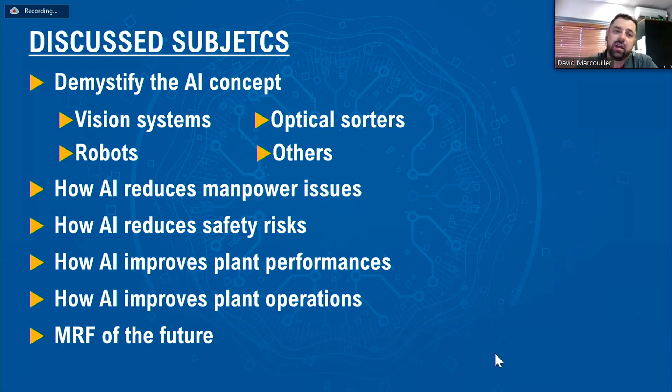So first, just to bring everybody on the same page here, I'm sure a lot of you speaking with me this morning already know this. Artificial intelligence identifies what it sees through a camera, which is the eye, pretty much the same way a human eye does. So it sees color, it sees shape, it sees characteristics, and it can learn from it.

It can recognize dirty material, commingled through forever changing situations, just like the sorter would do. It continually improves from operating experience to get better detection and identification of the products. It can get the data all together and compare it to generate the signals that it needs to generate.

It can identify stream composition as well, based on the volumetric surface area. Pretty much, when we do AI in our robots and in optics, it's the same way. We also always go by order of priority for tasks, and it's most likely always based on price. When we do sorting, when we do quality control, it's based on surface area to get what's heavy and large out of the stream when we want to QC a stream. But that predetermined order is something that we can play with based on the need.

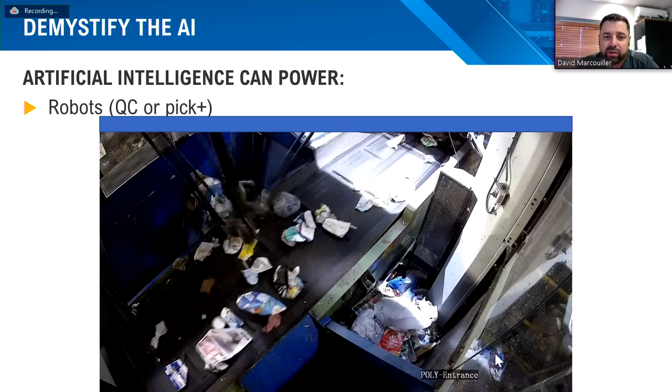And I've got a second video where it QCs a poly line. Same thing. You can see some of the products also disappearing right when the robot tries to grab it. It's because the conduit that creates the suction on our robot is over 2-inch diameter, and some of the material can get sucked up straight to a cyclone, a discharge cyclone on the side, to prevent jamming in the nozzle. But that's a little bit of what they do. You can see how fast they're moving and the kind of tasks they can achieve.

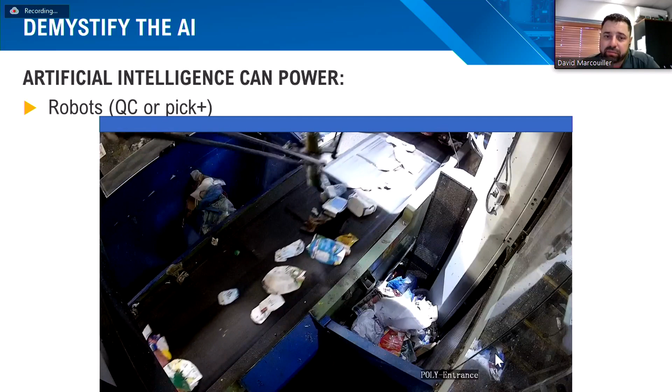So they're powered by AI. AI can also be utilized in optical sorters, combined with the hyperspectral. They can power the air jets, get the optics to do a better signal because they're combined with what even a human eye cannot see.

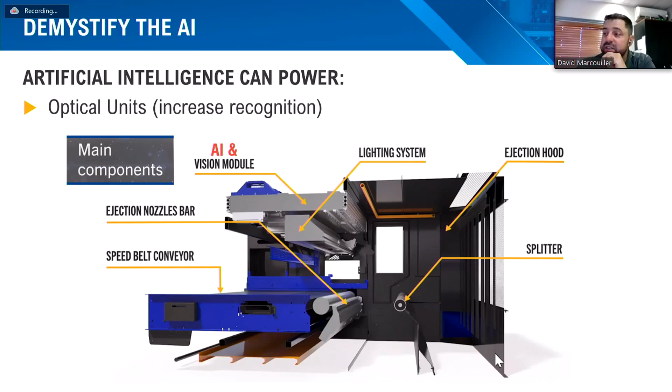So I'm getting to the manpower part of my presentation now. It's just presenting all of that to show what it does and where it pretty much substitutes or helps complement the manual sorting position, so the AI combined with the hyperspectral in this case will get better signals and a better decision-making process for the material and what it needs to do with it.

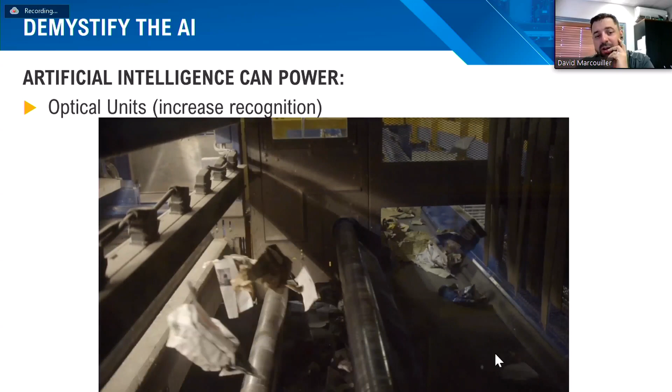That was an example where those signals combined are firing on brown material. So we combine the vision system with the visible material with the hyperspectral in one optic. So we're ejecting down all of the plastics and up everything that's brown here.

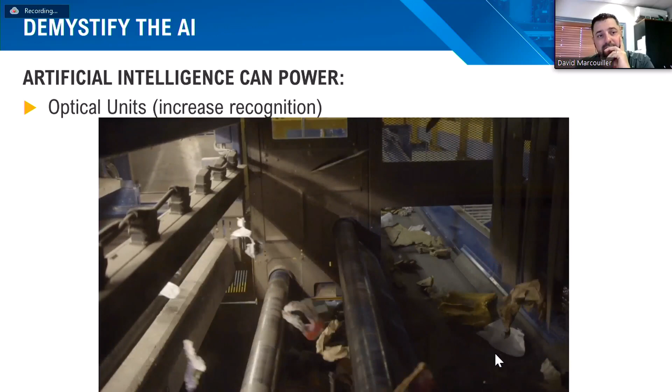So how AI reduces manpower, that's the big point here. The vision system, AI applied in a vision system, can reduce the required manual audits. Those vision systems are being installed on end product lines or on the line that's usually going to the landfill, to the rejects, so we can see how the system is efficient. We can see if we're missing a lot of material, and we can see if something's wrong with our optical system or other sorting equipment in the facility.

So they basically reduce the need for manual audits because you can definitely see a trend. They can report a real-time tendency of the MRF. You can go with that.

They just don't do it all day, and they're not necessarily constant. And when they don't show up the next day, that's affecting the MRF and the whole recovery system. The robot shows up every day. There's no break. It doesn't go on pause, and it doesn't shift its focus to something else or somebody else talking to it. It just sorts all the time.

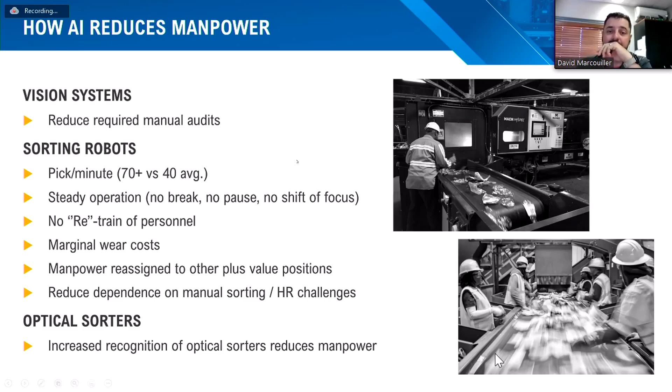The AI and robots are protecting workers from high-risk handling situations, needles, and safety problems that can happen. We've all seen a plant shut down because of needles coming in and being broken all over the place. This is something the robots don't suffer from, obviously.

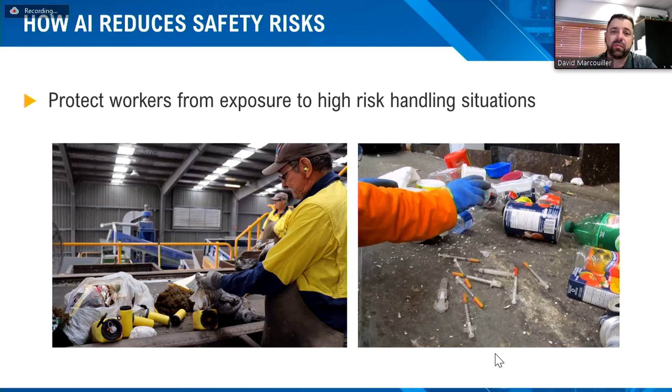And with the AI and continuous learning, evolution, and optimization, the vision system and plant interconnectivity basically give you, the operator, a better vision of everything that's happening in the system, combined with the SCADA system.

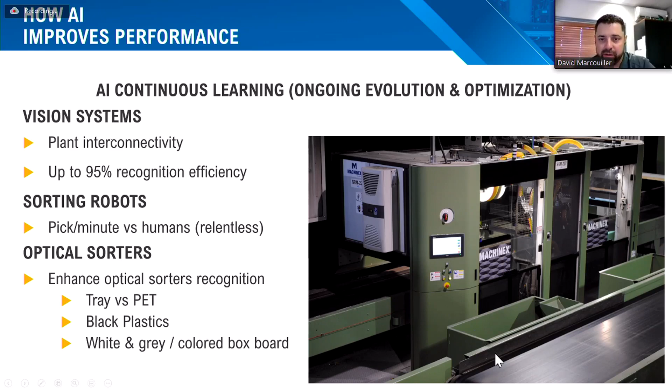The sorting robots' picks per minute versus the human, we just saw that increase significantly. And the optical sorter has enhanced optical sorting recognition - tray versus PET, black plastic, white, gray, colored, and box board. So all of the better identification through this whole process.

The challenge is the variation of the inbound material and government regulation. We see a lot of EPR being installed here in Canada, bottle bills, all of that. The AI can adapt and you can improve your sortability around it.

The artificial intelligence benefit gets all of your equipment that's equipped with AI connected together in a MRF to give you real-time information as well, which sorters wouldn't be able to do. They all do their job, but in the end, they don't necessarily report what's happening and how the material is changing, and whether the system should be adapted down or up because material's not showing up on the belt or something like that.

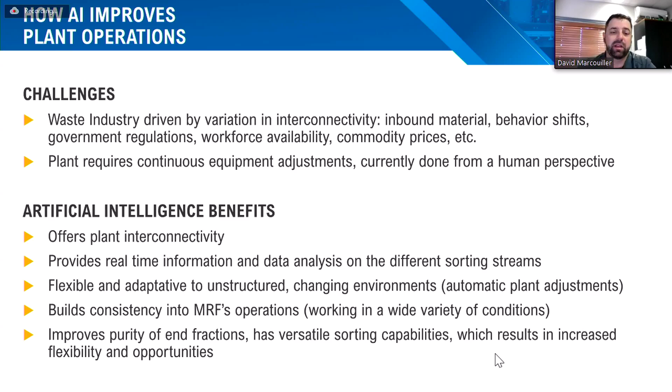So all of those together are bringing you to pretty much a plant of the future, where all of that interconnectivity of all the AI technology gets combined together for a successful plant operation - predictive maintenance, cleaning, failure, or something we didn't talk about necessarily yet.

It's all of the information you can gather from the MRF. AI is not just necessarily visible recognition - it can also learn from the breaks, learn from all aspects of maintenance in the system. It can be integrated into failures and maintenance recommendations for the whole facility.

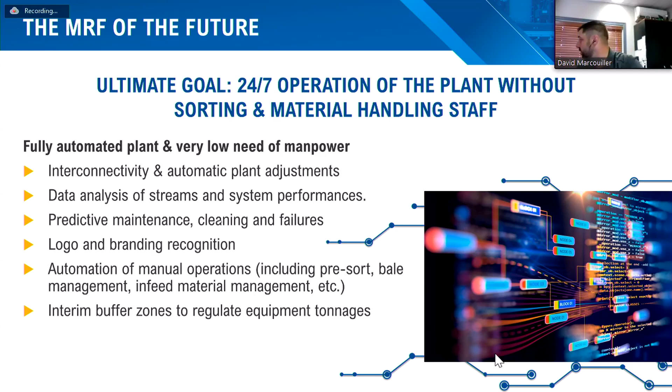And that completes it. I don't know if I took more time than I have or everything, but...

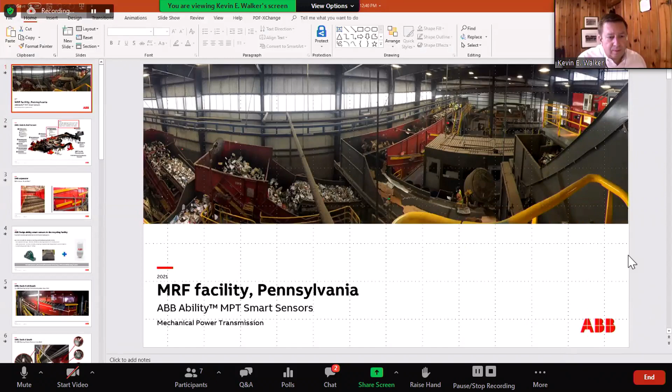And we'll go to the PowerPoint. There, very good. You should be seeing a panoramic shot with a cell phone of a recycling facility, somewhere in eastern Pennsylvania. The customer here has actually given me permission to use these pictures and their name if we want to talk about that, but this is sort of a generic presentation. This is a case study - we're going to talk about one application we see here and what the ABB and Dodge business has done at this facility. I appreciate your attention, and I hope you'll find this helpful and interesting.

I kind of skipped the introduction, so let me talk a little bit about myself briefly. ABB is a huge company, we make robots similar to the ones you just saw - I was very impressed with David's presentation, we make robots that probably do similar things. We have four separate divisions within ABB, one of those is called the motion division, that's motors and mechanical power transmission, and that's the division in which I work. Within that division, the US-based mechanical power transmission brand is Dodge, the old Dodge brand of power transmission equipment. So that's bearings, bushings, belts, connections, all that kind of thing.

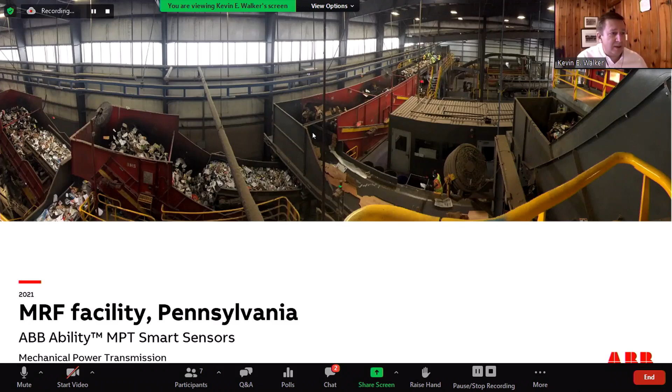and remove those out of the application very early in the stream here. Just keep in the back of our mind what happens if this machine is down for any period of time, and what that does for the rest of the production cycle.

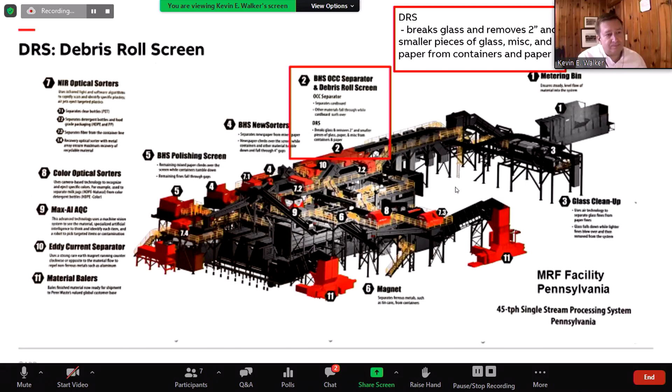The inside of that machine, if you buy a brand new one, will look something like this. They're not all exactly the same, but this particular model where our technology is being used has a bank of 15 shafts, and each shaft has a triangular shaped disc on it that is constantly turning against each other, designed to break that glass in that application.

As time goes, that glass is very abrasive. It wears down those triangular discs that are on that shaft. It's a very aggressive, dirty application, and this is a wearable part within this machine.

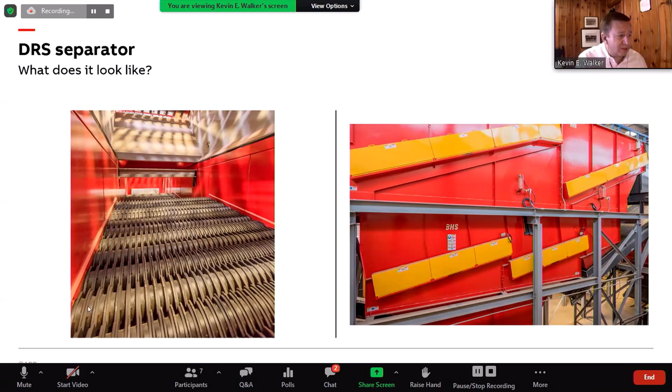On the outside of the machine, again, you see these doors or guards. These are safety guards, bright yellow. Behind that, you would see the bearings that are outside this machine on which these shafts turn.

So what is going on at this process, and why are we talking about Dodge bearings in mechanical power transmission in a robotics presentation? Their current maintenance program at this facility is every 2 years, because these shafts have worn down so much they have to buy and replace 30 shafts in that machine, 2 banks of 15. That's 60 bearings that they also replace at the same time.

Not only does the shaft wear out, but the inner and outer ring develop a looseness over time because of the bearing being worn out. Their general maintenance practice every 2 years is to take these shafts out, take the bearings out, and replace everything, basically starting with a new machine. That was done 2 replacement cycles ago, in the summer of 2017.

In January 2019, we launched a product called the Smart Sensor for mounted bearings. That's what you see on the right-hand side of your picture. And I've got a bearing I'd like to show you here on the camera. If you'll just hold on a second, I'll get that out.

What we started doing in 2018, in preparation for this launch, is machining our roller bearings to include, besides the grease fitting where you would re-grease the bearing, a smart sensor tag opposite the grease fitting, creating kind of an isosceles triangle shape. That extra tag allows the sensor to be very easily inserted into the bearing.

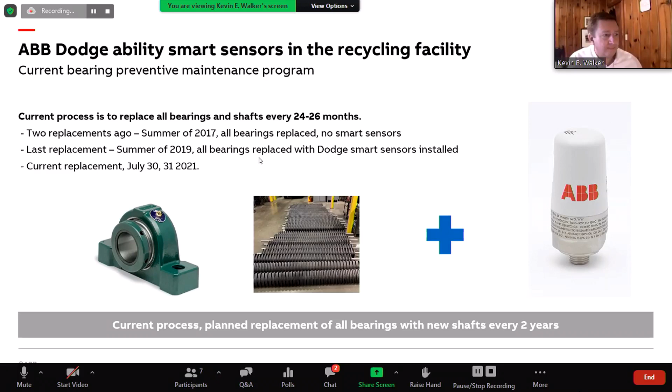I was at the customer site for the initial installation 2 summers ago, and this is what it looked like. These are the south A and B decks on the side. There's a catwalk, so it's very easy to access these bearings. Obviously the guard has been removed here, and you can see the bearings with the sensors installed.

This is a motorized gearbox that is turning all of this business here. The same application here, you see our smart sensors installed on these 30 bearings. But that's basically the process.

Commission the sensor, label it, get it attached within the ABB Ability Cloud. And ours, just like David mentioned for his process, is a cloud-based, data-driven system that allows the customer to know within an hour what his equipment is doing. So every hour our sensor takes a reading, throws it up to the cloud, and he has all of his data available to him.

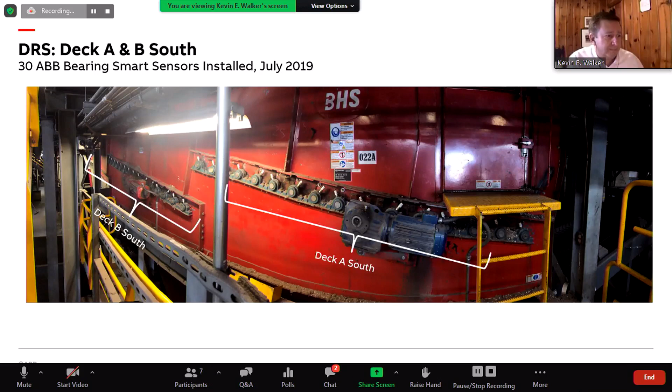We use a gateway to collect all of this data. This is a control box that is near these two banks of sensors, about 21 feet away. We've gotten data from over 600 feet in an outdoor application with this type of router, so we have very good connectivity here.

We're constantly reading the data from these sensors. They operate with Bluetooth Low Energy, and they communicate back up to the cloud through this gateway that is hardwired into their local area network here.

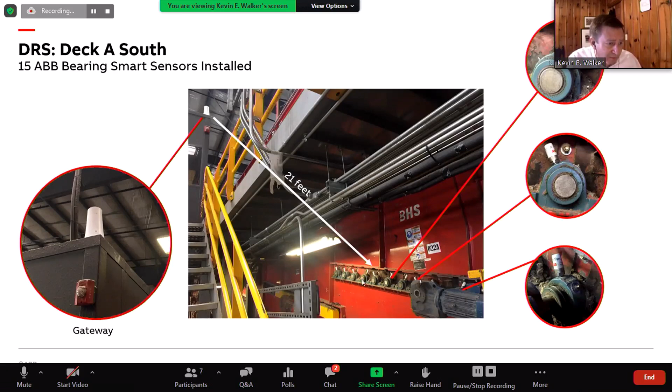This is, of course, the south side again, where that catwalk is, and you see all of our sensors and bearings. We've got the guard put back on here and our gateway installed here.

Another picture of that, we just wanted to show you how they look when they're all labeled. You see a little bit of a difference here in these two. When the customer bought the new bearings in 2019, they had some old stock shipped to them that did not yet have the drilled and tapped hole.

Here you've got the sensor offset from the grease fitting. In this case, there was no drilled and tapped hole. It's a brand new bearing they bought, but it was just old stock that was still washing through our distribution channel. So we sent them some of these adapters that we carry in stock that allow the customer to still re-grease the bearing and install it and gain the benefit of the smart sensor. That's the little adapter you see there on S12 as opposed to S15.

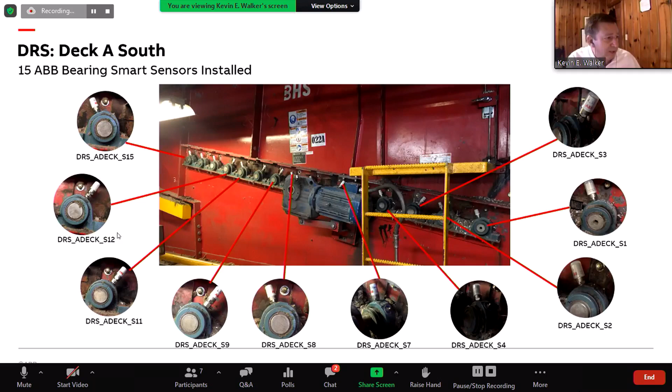This is the north side. You have to have a man lift to access it. That's what you see in the bottom half of this picture on the right, the top guard on that man lift. And then these yellow guards come off and you have access to the bearing behind a chain sprocket.

It's very challenging to clean in that area, and challenging to replace that bearing. It's a lot of downtime if a bearing goes out during the middle of a production cycle. So again, you see the smart sensor here, and in this particular side, because it is accessed by a man lift, they have an automatic greasing apparatus here and lube lines running to the different sets of bearings.

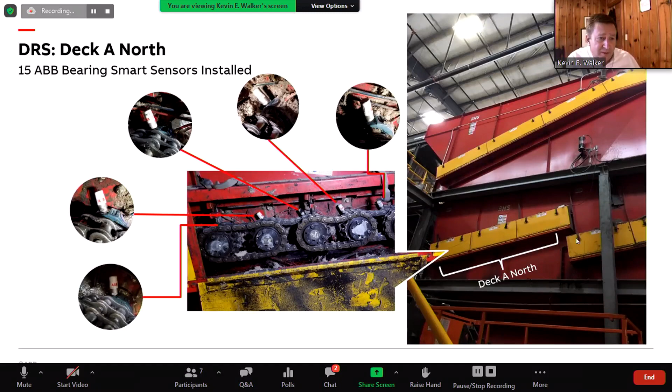Another picture of that same application, you see the automatic lubrication system here, and then you've got lube lines running to the bearings here with sprockets. That's what you see on the right, the north A and north B decks of bearings.

So that's basically the installation. We've talked a little bit about their maintenance process, and about the installation of smart sensors in this facility. What does it all mean? What does that actually mean for the customer? And what has that meant for our business as well in helping them understand what's going on with their equipment?

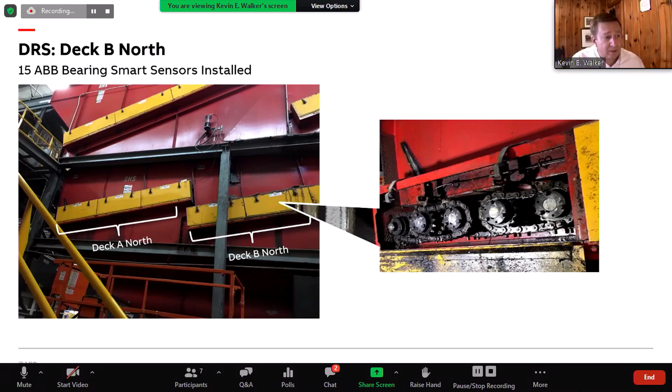Here's the final picture of this installation. You see we put another gateway. That is a temporary location, mounted on this bracket here in a more permanent mounting, but we're using this conduit to run our wire. That again is through their local area network, a second gateway. It's a redundant system. You only need one gateway in this particular application because of the closeness of the sensors to where the gateways are located. But we have two of them in case they have a power failure. One of them might still keep, if it's on a different power line, might still be collecting data.

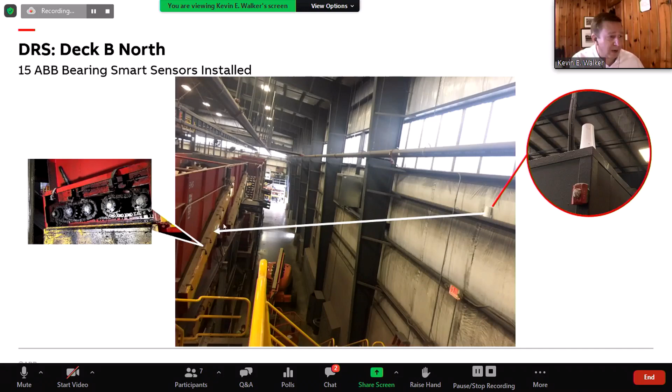So what is the problem in this application? And, you know, I'm of a certain age where my kids are nearly grown. I've got two still in college, but they're out of the house. But my first child was born in 1996.

And in 2001, if you wanted to watch Bolt or The Incredibles or Over the Hedge, or for my daughter, any of the princess movies, Cinderella from Disney, you had to go to this little store called Blockbuster and rent a plastic video cassette. Now, for those of you under the age of 40, you don't know what that is. It's a plastic box about this big, with two plastic wheels that turn in it. Wrapped around those wheels is magnetic tape, designed with a very high tensile strength. You can cut it, you can tear it sideways a little bit this way, but it's very hard to break just by pulling on it.

These plastic cases come apart and similar devices like this, and that tape comes out of those spools. If they make it this far into the application, they start to wrap around those triangular disc shafts on the inside of the machine. When they wrap around that shaft, they create a binding in the bearing. What they will do is crawl down the shaft until they're cutting into the backside seal of the bearing. Once that's happened, that shaft may turn a few more cycles, but that bearing is gone.

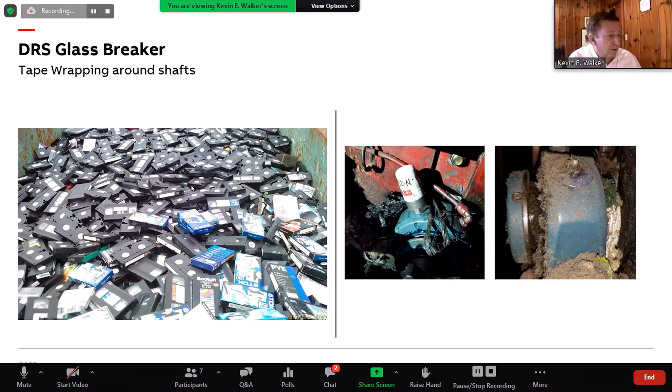So I personally blame Walt Disney for all the problems we can have with these bearings. He's the reason why we had all these black plastic cassettes so many years ago. There's a box of those in your attic, probably. You need to throw them out and make them into digital, but that's a significant problem and things like that.

Here you see a bunch of material on the backside of this bearing. In 2021, about a week and a half ago, our sales guy was on site with some of our technicians here, and we replaced all of the bearings with new ones, their regular replacement method. Every 2 years, they replace all the bearings and all the shafts. This is sort of a before and after picture. Since they were approaching replacement time, they relaxed some of their cleaning standards, so this is probably worst case scenario for the dirt on these bearings.

But again, this is before and after, and now you've got brand new bearings. The smart sensors have been replaced. All the historical data is maintained. And you've got basically a brand new sorting machine, DRS, debris roll screen, to start with the next day.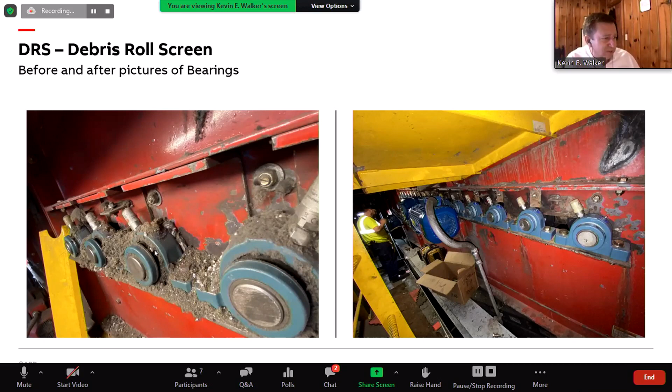Again, look at that picture of that contamination in that center bearing on the left there, wrapping around that shaft.

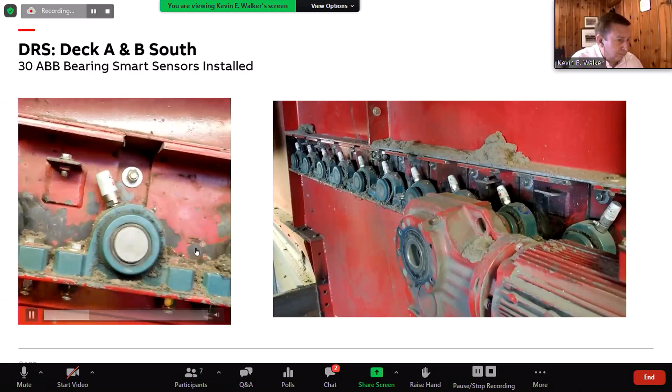This is a short video we're going to play. I hope you can see this. I don't know if you'll be able to hear the sound on this, but I think this is interesting. You can actually see something turning with the shaft on that one.

So there you can see, just in sort of a real world application, what that actually means for these bearings.

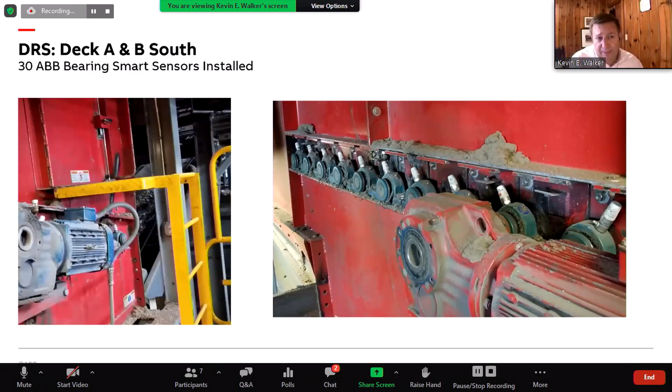When we're looking at those shafts on the inside of the machine, the customer pointed out that this is a really good example of how these shafts wear down over time. You see the edge, the rectangular edge on this glass breaker, how sharp the corners are, how sharp the little flanges here, the squareness of it. Then look at how rounded off these have become over time. Look at the gap you see here. This is not supposed to be here. So this creates inefficiency in this machine as these parts wear out over time.

So this is right before replacement. He actually was able to stick his hand down into that hole and show me. Of course, we were locked out and tagged out to do this in a safe manner. But the maintenance manager was able to show me how far apart these have become over time, because that abrasive glass is wearing that metal down.

Again, this looks dirty here, but it's actually a very clean setup. They've gone in, they've replaced the shafts. You see how tight they are. That gap is not showing there. These teeth are interlocking. It's ready to go, to start breaking glass again and moving equipment through their MRF stream.

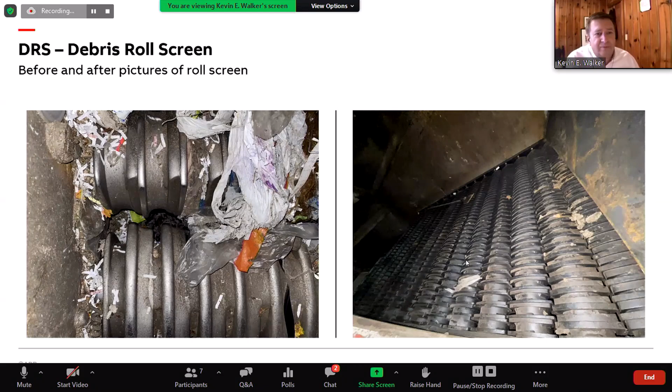There are vibration levels we take, and we can use that - we're using that information in artificial intelligence. We've got 60 bearings here, and that gives us some predictive capability with artificial intelligence. But the Dodge business probably ships - I'm just going to try to remember from my time in that business unit - we probably ship 20,000 of these individual 1 and 15/16 shaft bearings every year. We start to get smart sensors on any kind of percentage of those, then we will know everything at that point. We've got 10,000 bearings of the same shaft size, turning the same speed, and we're collecting data from them.

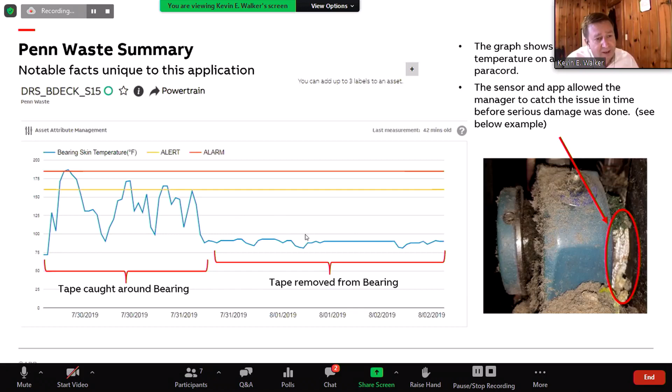This is an email from August 8th, 2019 - about 2 weeks after we did the installation. Kevin, I hope all is well. We had one save from the data - those number 15 shafts had wrapping on both the north and south sides. We were able to drop the bearing temperature by 80 to 90 degrees. And then we had a conversation about coffee, so we had an extra comment there. But this is from the maintenance manager at this particular facility in York, Pennsylvania.

So I've talked a lot, and we're going to get some questions here if you have some, but I wanted to give you the actual results - the real world results after this 2-year test case of smart sensors in this one application in the MRF stream.

So our planned replacement process is every 2 years, we replace 30 shafts and 60 bearings. We did that in 2017, but we didn't have smart sensors. We did that in 2019, and we included smart sensors. And we've now done that again, including smart sensors, in 2021.

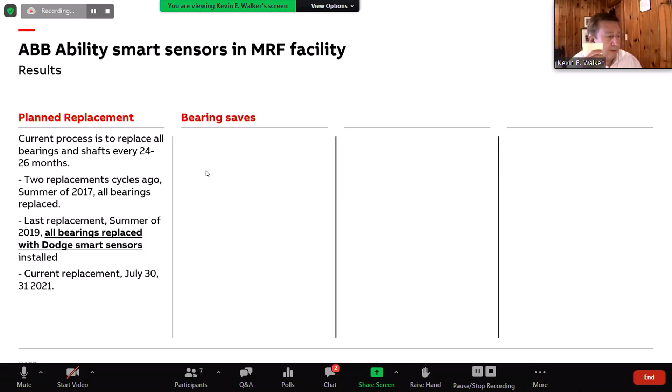When we talk about bearing saves, in the 2017 cycle, they had 10 bearing failures outside of their regular 2-year replacement. Between 2017 and 2019, they had to replace 10 bearings because that wrapping got so far into the seal area of the bearing, it destroyed the bearing and the bearing has to go. That means if they can't get the bearing off the shaft easily, they take a grinding wheel and attack that bearing from the front and side at an angle, grinding off the cast iron and steel down to the shaft level here and here.

Now the bearing is in 2 pieces and they're able to get it off the shaft. They've damaged the shaft - they've got to go in with machining and polish that shaft. Now they have an undersized shaft they're working with, slightly undersized. They've cleaned up the shaft and installed a new bearing, but they had to do that 10 times outside of their normal replacement cycle.

Now, if they have a contract through a distributor with Dodge, they're paying $300 and something per bearing. So that's $3,500 in cost that they encountered because they had to replace 10 of those bearings. In the 2019 build, we've replaced 2 between December 2020 and when we did our full 60 bearing replacement here a week and a half ago - actually we replaced 4, but they were towards the end, and they were more a result of looseness than the seal being destroyed. Basically, the shafts have become so warped, they have wallowed out the inside of the bearing. So that's a 6 bearing swing alone there that is going to be a cost of close to $1,800, $2,000.

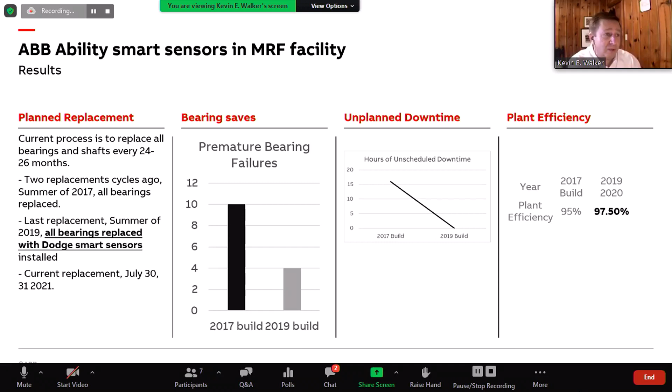I do actually have a question from here. I don't know if you guys can hear me. I can hear you. Cool.

Quick question. So we see it applied to existing bearings, or bearings that you can take from the shelf with your adapter. We have some machines that we design where we actually custom build a kind of bearing to switch those shafts, true shafts, so the shaft can now be quick coupling. So those quick couple housing and bearing housing, we custom built ourselves. Is that something we can just drill an extra hole into and apply your kind of detection process onto any type of bearings that we manufacture?

Right. You have to create a 1/8-27 national pipe thread hole. You create that hole, you can put it on the engine block on your car. Okay. You can put it on your pool pump. I assume you have the big in-ground pool since you're the executive president of sales, right? So you can put this anywhere. I actually put this on a magnet.

We don't sell a magnet mount because that requires an adhesive, which means it can come apart. And in the applications we work in a lot, aggregate sand and gravel applications, we don't want pieces coming apart in any application. But again, you create that hole and you can put our sensor on. We have lots of customers in paper mills that have enclosed bearings behind a bulkhead. They're drilling a hole in the bulkhead and screwing the sensor into the bulkhead.

Thank you, Sidney. I'm Richmond McGee. I'm with AMP Robotics. I'm glad to be here today and grateful for the opportunity to speak. Thank you, Gene, for inviting us. I thought David did a really good job of sharing an overview of the robotic systems and some of the benefits of bringing automation through AI and robotics into the recycling industry, so I'll try not to repeat too much of that in my presentation.

I really appreciated Kevin's talk on automating some of the MRF operations and limiting downtime. What I want to talk about today is using AI to get data to help make better informed decisions. What we do is around material characterization—what's coming into the MRF and how we want to sort things.

So let's get into it. Let's see here, figure out how to use this. All right, so our mission at AMP is really to fundamentally change the economics of recycling. We want to reduce the cost of sortation by using automation, and we do this by trying to create a repeatable process.

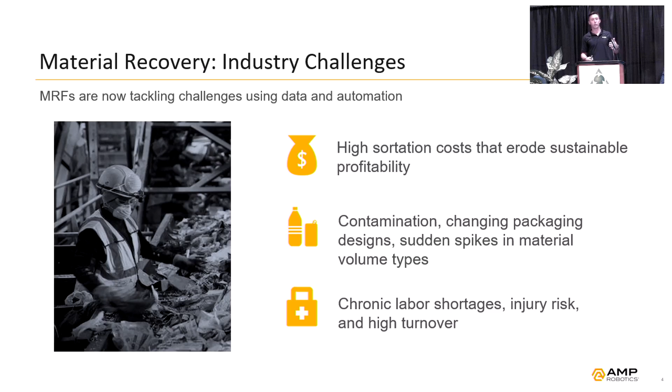The challenge of replacing a human sorter with a robotic system is a really complex thing. We've built a system that works a lot like a human. So if you imagine the eyes of a person looking at the line, their brain telling them what that thing is, and then their arms going to pick it up, you can envision the same type of system. So 3 parts: it's literally a camera that looks down at the line, and it's seeing all of the material that passes by. One of the things David mentioned was needing to be able to see all of that material. It sees in 2D, so it's not going to be able to see under something like perhaps an optical sorter could. So we want a really well spread out stream to make the vision system able to see everything and recognize everything.

That image is going to go to our brain, our computer system that sits there, and it's got our proprietary neural network on it. That's what's going to actually detect what the material is. From there, the brain will tell the robot: we want you to pick out the PET, we want you to pick out the HDPE, whatever our customers have these robots programmed to do.

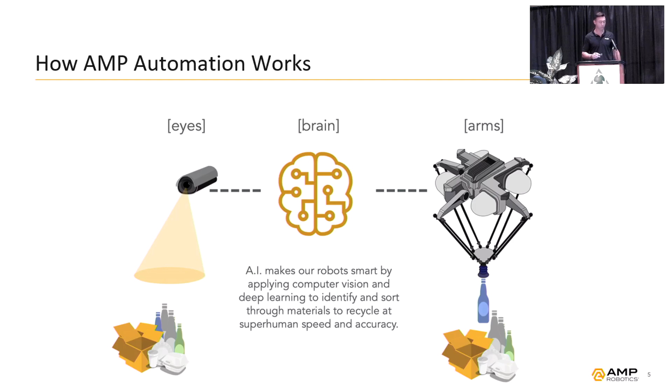This is a complex task because the images on the computer are just simply a bunch of individual pixels. I'm sure you guys have all zoomed in really close on a picture, and ultimately it's just a bunch of dots. So given a sample image with many different objects, how can the computer recognize which objects are actually present? Computers think in bytes, so we must first represent this image in a way that the computer can understand, and then begin to construct a data model on top of it. At AMP, we use leading edge algorithms to accurately identify and locate objects in an image on a conveyor belt packed with recyclables and contaminants.

The basis of this all is machine learning, I'm sure you guys have heard of that. For the machine learning, what we have to do is first categorize different things, and we've got a team of data analysts that do that. So we've got to build these categories out, and then the machine learning can begin to take place.

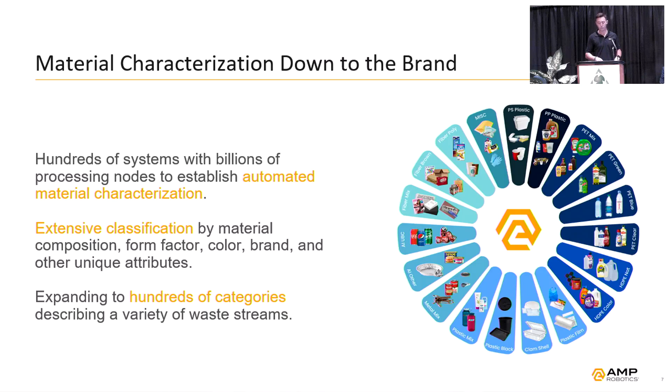This is a video, I might have to click it again, but this is just showing you, we've got the vision system looking at the line, then we've got the brain telling it what it is, and then you pair that with a robot behind it.

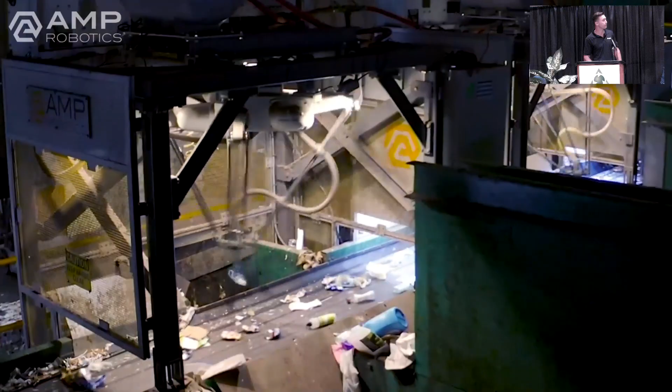Each one of our customers is telling these robots what they actually want their job to be. These robots work anywhere from say 60 to 100 picks per minute, depending on the application and the cycle time. The cycle time is how long it takes the robot to pick up an object, place it in the chute or bunker, and then return back to work. A standard for us is about 0.75 second cycle time, which equates to about 80 picks per minute.

Comparatively to a human sorter, that's about twice as fast. We've done studies and research and watched human sorters over an 8-hour shift, and a human can do 80 picks per minute, but the likelihood of a sorter doing that over their whole shift without slowing down is unlikely. Seems like every MRF has one sorter that's their star sorter that they love, and they say, man, if I could just have 5 more like him or her, we'd be in good shape, but it's really hard to find those people.

So this is the power of the network and the machine learning, such that if you studied all of these materials and never forgot what anything ever was, and you had the benefit to know everything that everybody in this room ever learned as well, that's the power of our network. As we get more and more robots deployed and vision systems out there, the data is getting exponentially bigger and stronger and more accurate.

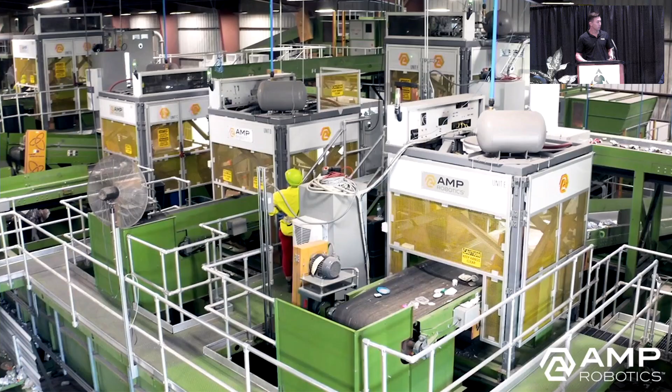Let's see if I can go back. This is a facility not too far from here, in Sarasota. They've got 14 robots deployed in that facility. 8 of those are on the fiber lines doing QC on a negative sort, and then also a lot of quality control on the containers as well.

Again, the robots can have a number of different types of programming, but negative sorting, removing the contaminants, and positive sorting, picking for value. Depending on the application, we'll have the robot do different things.

I get asked a lot too, like how much can the robot do? Well, that's really limited by how many chutes we could have on each side of the line. So for a less sophisticated facility, let's say you just have a container line after a screen, you could have that robot picking all of your plastics out. We just have to have places for those to go, so we've got to design it such that the reach of the robot is able to do that job. But as far as the programming of the robot, you could pick every single category we have if you wanted to, or just one category.

So kind of bringing it back to the real message of this presentation, and how do we use some of this data to get better at what we do.

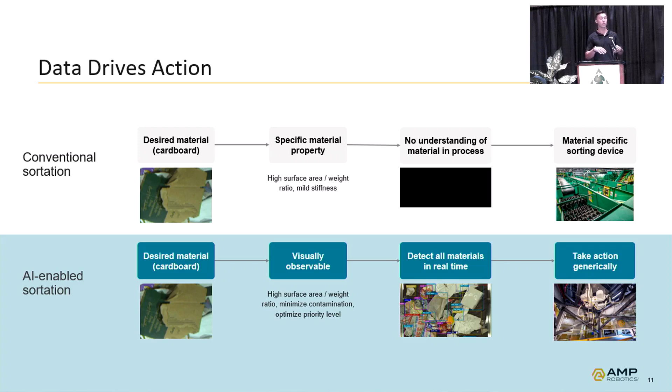So a conventional sort process, as you guys know, with some screens and different types like that, it's going to get some of that material using shape and weight and different things like that. With the AI-enabled sortation, we're really using vision and knowing what that material is, and then using the robots to actually sort that material out.

We can put these systems really anywhere in the MRF that we can see the material stream. As we get better and as the MRFs change, the further upstream and downstream we can go. I would say right now the ideal location for a lot of these systems is kind of after some sortation has already been done.

Some locations we can put the systems up on the in-feed conveyor. We want to be able to see all of the material coming in and know what zones brought different materials to the MRF that day. Maybe there's a large contamination in one zone and you need to go educate the community. Well, you can know that by putting the vision systems up ahead of your sort stations, knowing exactly what's coming in.

On the other side of the MRF, you might want to know exactly what's going into your baler. If you've got a good spread of the material and you can see that, then you might be able to dictate a higher price for your material because you know you don't have as much contaminants as maybe some other guys. So you can use that data to drive a higher value for your material.

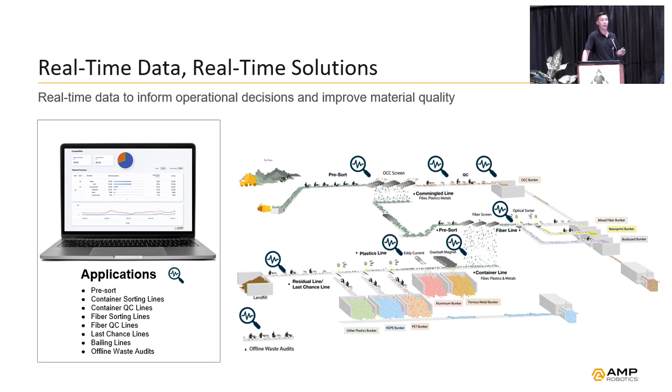Then throughout the MRF, knowing the data at your different lines could clue you in on maybe your optical sorter is not working, or maybe you need another sorter because you've got so much contaminants coming down. I've got one slide in here on the residue stream that shows how much value you're actually losing because of a lack of sorters, and that might clue you in on, alright, we need some equipment upgrades.

This is our standalone vision system. So this is the same, this is the eyes and the brain, just not the arms, the robot behind it. Along with the robot systems, we can also just put these systems in as well, like I was speaking of on the in-feed or throughout the MRF or right before the baler.

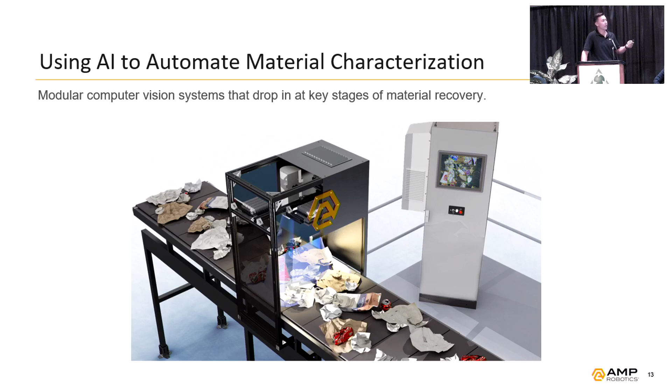Just depends on the spread of the material. Sometimes we can help that by speeding up the belts or doing something ahead of the stream to really get the material on a good spread. But this is just a standalone vision system that will let you have the data you want to make the educated decisions.

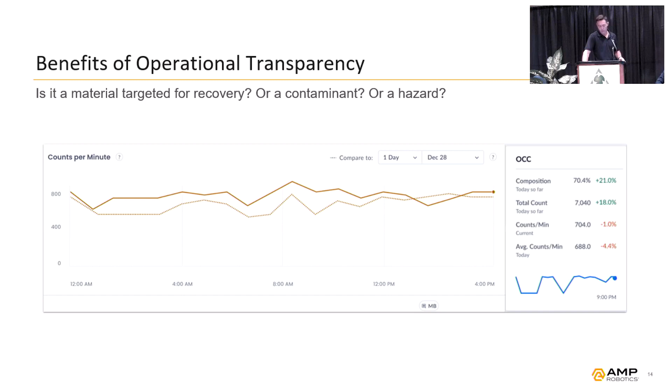Some of our customers use these things to really have that operational transparency, audit lines, QC lines, residue lines. This is one example of one of our customers who put a vision system on the residue line, and we saw that they were losing about $150,000 of UBC a year. So putting a robot sortation in not only helps them generate that revenue, but also reduce their cost of going to the landfill.

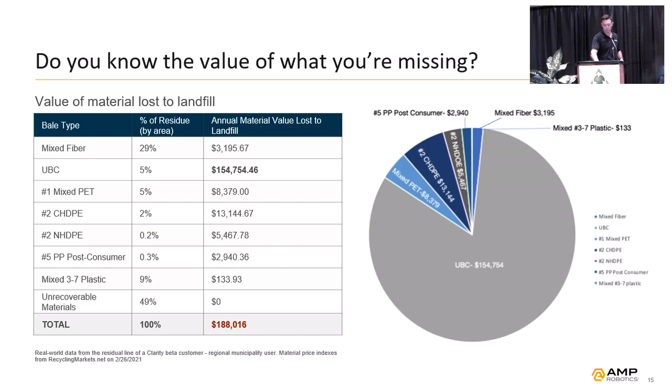So what does the road ahead look like? As we build new MRFs and discuss how to use this data within the MRFs for customers that are building new MRFs, really having these sensors throughout a MRF and building it in a way to where we can see the material becomes the data-driven way to sort material, in a way that you can see what's coming in, see what's happening throughout, and use the robots to divide up the material.

The robots will work 24/7, whereas some facilities are built to run hard for 8 hours and try to get all the material through. Some of our customers are now talking about how can we, if we can fully automate a facility, we don't need to build it as big, but we can keep running the material through and have kind of that skeleton crew that just makes sure the system keeps running.

On that, you can rerun that material because you know exactly how much material is left for the robots to grab. So if you see that you still have a lot of value going in the stream because you can see all of the data of what's going through, then you can keep running that. The robots have a finite number of picks that they can do - about 80 picks per minute because it's grabbing each object.

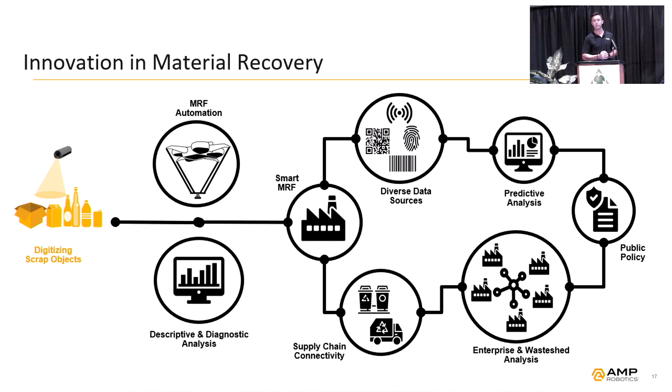Anybody have a question? Yeah, there's one in the back, too.

So one thing you mentioned is that the robots see it two-dimensionally. In terms of what's coming, do you see three-dimensional or density scanning as an innovation down the road?

I think there's a lot of cool stuff you could do like that with these systems, and we've looked into some of that, and some of the work we're doing with the Department of Energy is kind of along those lines. We've got a huge team full of really smart people constantly pushing the limits on what we can do and how we do it. So I couldn't say for sure that we're going to be doing 3D, but one thing we can't do right now that we'd really like to do, and that we're working on, is knowing the weight of things.

So we can see the size in 2D, and we'll put a size dimension on it. But if it's a piece of cardboard or a really thick book, our system right now is going to kind of see that and weigh that the same. So how do we get to that level? Is it through 3D or some other way of sensing it? I do think that's coming, but nothing to speak about yet.